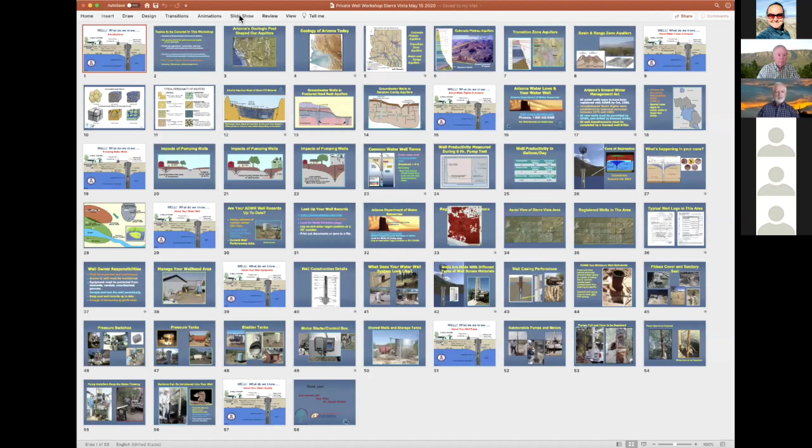All right, Janik, let's see if I can take over the control here and get my presentation going. Is this showing my desk? Just a moment. It does - that should be good. Go ahead, put it perfect. Are we good? All right.

Well, thank you, Marianne, and thank you, Janik, for the introduction. Let me just say something about my position. I am still a registered geologist, I am a past licensed water well drilling contractor, and a past president of the Arizona Water Well Association, which is the drillers' association. But it was introduced there on the slide as a Water Well Owners Association, which is something I dearly wish that we had, because unfortunately the water well owners throughout the state don't actually have an association speaking specifically for them. So having said that, let me just pass on here to a little bit of the review of what I was going to cover in my portion of the presentation.

I'm a geologist, so I'd like to give you an overview of the Arizona water resources and the aquifers that we have, and talk a little bit about geology, because geology affects the performance, quality and quantity of water that you get from your well. There's just no two ways about it. Everything depends on location, location, location. I'd also like to speak about the private water well regulations and the agency that controls this, issues our permits for construction, licenses well drillers and so on. I'll show some examples of typical domestic water wells that may help you identify with what we're talking about.

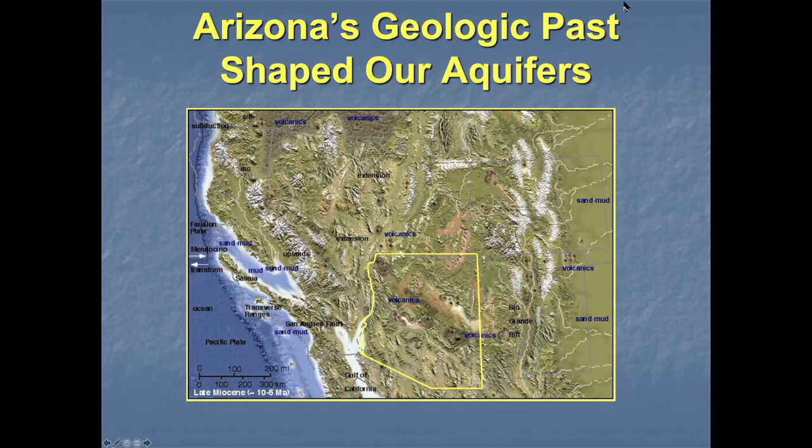As you can see here, representing 10 to 5 million years ago, there is a large area of California where the Central Valley was inundated by seas, and the Gulf of California hadn't opened yet at that time. But here's a picture illustration of what Arizona has today.

From a geologist's perspective, we say there are 3 major provinces in the state of Arizona. The Colorado Plateau province includes Flagstaff and a lot of the towns and areas up there, and the Grand Canyon of course. Up there, the geology is quite different than in either of the other two zones. The transition zone through Prescott runs from northwest to southeast through the state, and is predominantly a section of harder, crystalline, more resilient mountain ranges that have been there for millions of years.

Then the third area, down on the bottom third of the state, we call the Basin and Range province. In general, everyone's aquifers and the formations we get water from down there are pretty much the same, and they've evolved over the years.

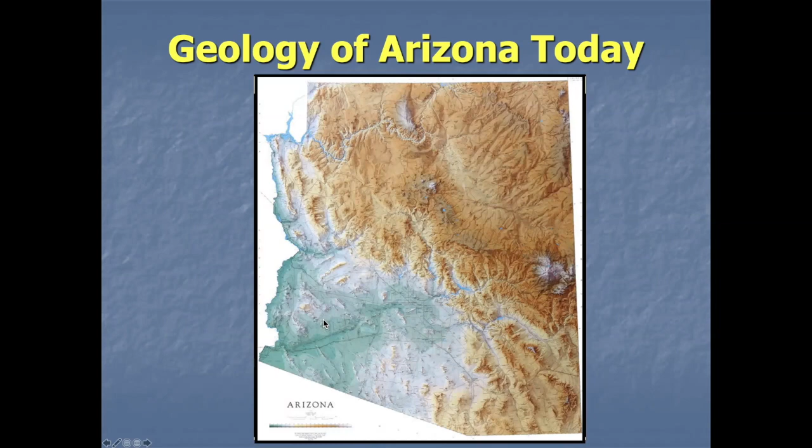Now, this is a topo relief map of the state of Arizona, where we can see that in the upper third of the state there are lots of ridges and valleys and even some drainages, such as the Little Colorado River and the major Colorado River running through it. I can also see a hint of some resilient mountain ranges running up and down through the center portion of the state, and then the Basin and Range province down here in the southern portion, which is predominantly where we are today.

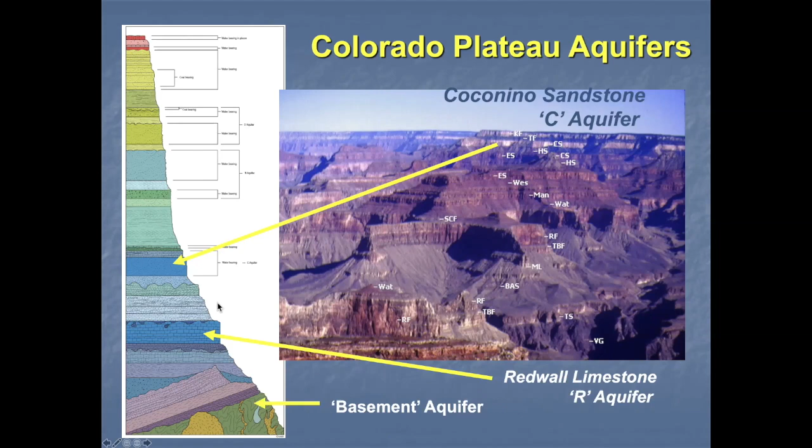If we look in the transition zone—we gave a presentation not long ago in the Prescott area, Yavapai County—the people there work with something slightly different. It's similar to the Grand Canyon suite, but some formations do not cover the crystalline rock. So their aquifers are crystalline bedrock aquifers, or fractured consolidated aquifers as we call them, along with a lot of very recent sediments, either sands and gravels or the basalts that have flowed out over the country up there.

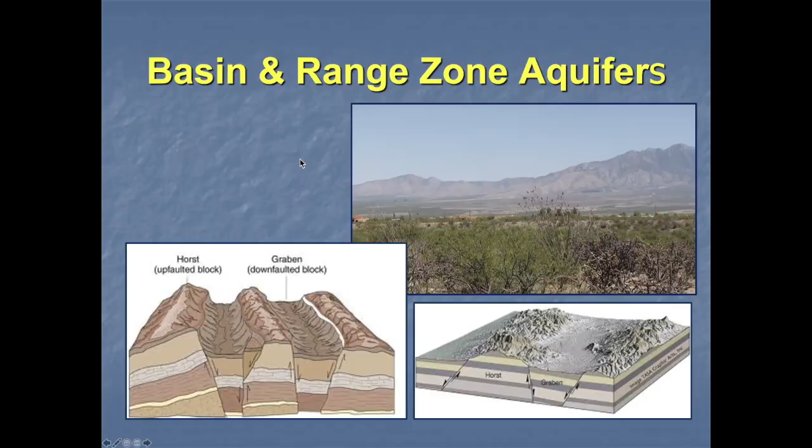As these blocks have settled down in these basins, in some cases hundreds, if not thousands of feet deep, and as they kept going down, water kept coming in, and in many cases evaporating. That's where the salt deposits came from in our area, and it's still going on in areas like Willcox Playa today. So that's a quick run through of the geology you may have in your particular area, or where your well is located.

But let me show you what that means for the availability of water for you. I'm going to talk about what we call porosity, which is the ability of different formations to have water in them, or to hold water in them.

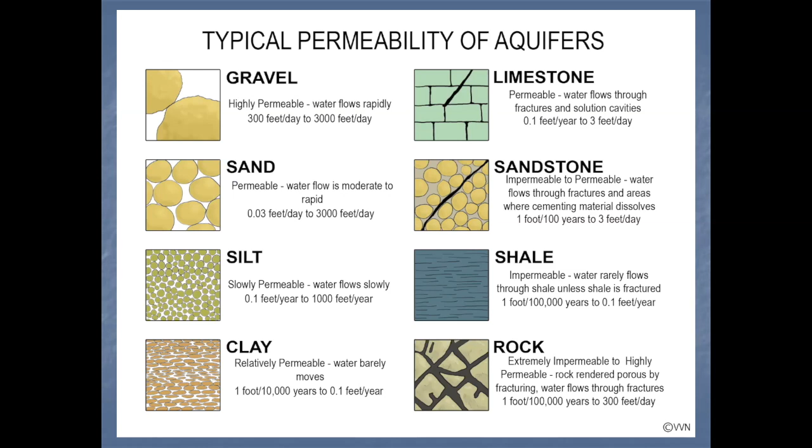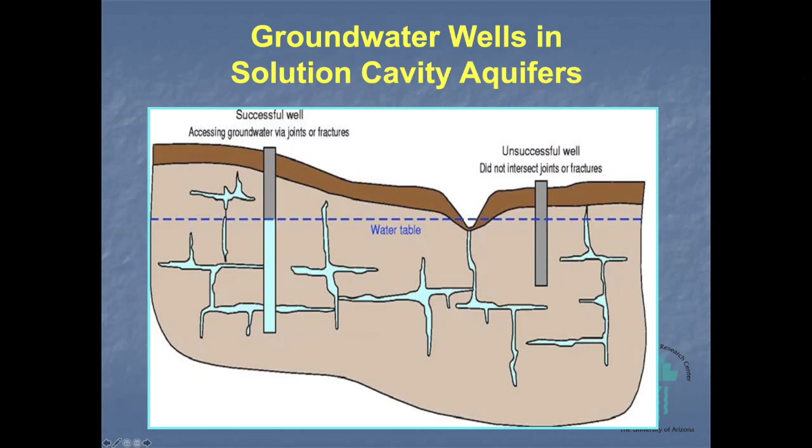And the same goes for down in the flats. It just all depends on fate and chance as to where your well is located, and we have to look at each well individually to probably find a reasonable explanation for the productivity of the water you get. Here's some additional illustrations that show how you could be in a fractured limestone formation and have a very good well because you're connected to a lot of the solution cavities, such as this one over here. And then you could drill another well in the same limestone formation but not hit any of the solution cavities and basically have a dry well. That's just the nature of the geology and the way it works.

Now, I could speak a little bit about water rights in Arizona, but in some ways that's a misnomer for the type of exempt wells that most private well owners have. But I can start by saying that the control and management of all the groundwater in the state of Arizona, which belongs to the Arizona public at large, is mandated under the control of the Arizona Department of Water Resources since about 1980, when the Groundwater Management Act was passed, and they became the controlling agency.

If your well was drilled before that time, it was probably still under their control. There's their website, azwater.gov. They have an 800 number you can call to get information about your well, or about aquifers in your area, or about water quality conditions known in your area. We can also note that the records about your well are public information, available to anyone who can go onto the internet and look the information up.

Now, this was relatively new at the time the Management Act was passed in 1980, but a lot of other states have followed up with this, and they also have their well data records public. California is just now, in the last couple of years, making all new well records public, but all their old data is still considered private information.

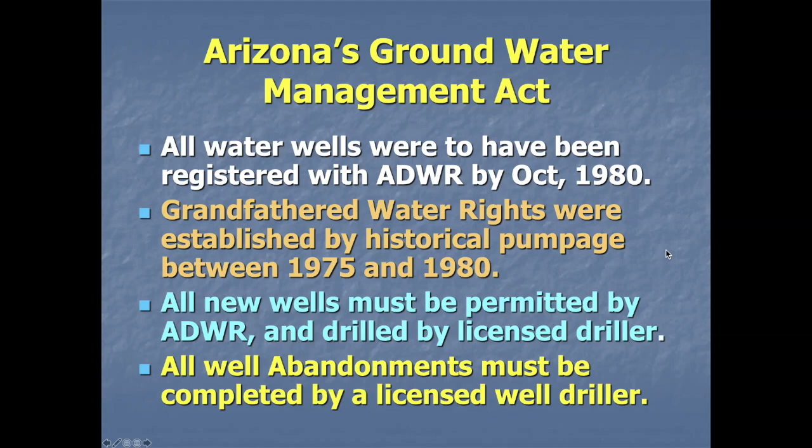So in theory, after 1980 at the very latest, we should have had a pretty good count and control of just how many wells of what type we had in the state of Arizona. I just wish that was as true as I've stated. I'll explain why in just a minute.

But now, Arizona did create, in the Management Act of 1980, 5 active management areas. Here they're illustrated, and you may have heard about them or read some news about them. The Prescott AMA is one, the Phoenix AMA is another, Pinal, Tucson, and Santa Cruz. But we are in Cochise County, mostly, our listeners today, I guess, so none of the rules that apply to the wells in those areas apply in Cochise County.

Talk a little bit about pumping water wells and how they actually work. Here we're going to use some kind of cartoonish illustrations to talk about a situation, and this represents as time has gone on.

Here's a homestead out in Cochise County. They built the home, built a barn next to one of the streams at original levels, drilled a well, and you can see their pumping water level has a little bit of a depression around it as the well is being pumped. But the water table, the static water level, as I'll refer to it later, the original water table is the same as the flowing stream that was over here. This would be a perennial stream. Any stream considered perennial is in contact with the groundwater.

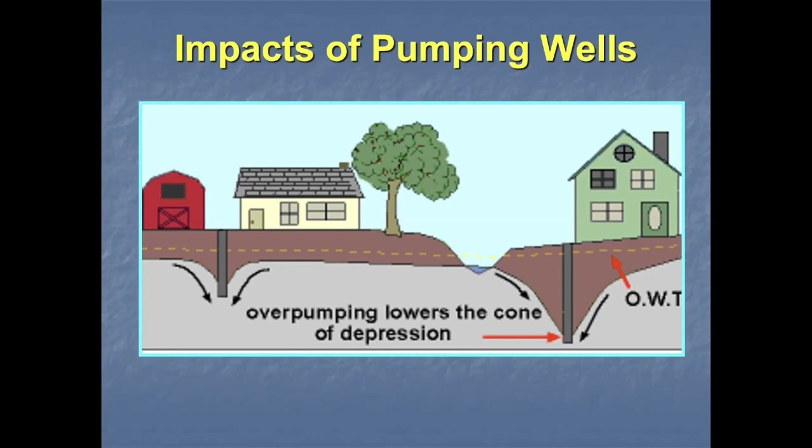Now, as time goes on, other people move into the area and also put in wells, possibly a deeper well. They might even pump it a little harder, drawing the water table down a little more. In some cases, it can have an impact on a neighboring water well, but it also has an impact on that perennial stream and the water table—they both get lowered. Scientists know there is a connection between the groundwater measured at this water table and the flowing stream. But in Arizona law, these are two different types of waters, controlled by two different types of management principles. But this is what's happening—they are connected.

Then we'll take a third scenario, maybe representative of what we're seeing today, where something comes along and pumps the aquifer, the same aquifer our homesteaders had their well in. Now it can be a factory, a farm, a bigger development, a community development, or anything like that that creates this—it can just be passage of time with continued pumping of the same aquifer. And it has, in this case, pulled the water table down below the bottom of the homestead well. This is something that has been occurring in Cochise County. It's documented. Unfortunately, that is the situation.

It leaves the homesteader with only the option to drill a deeper well or a newer well, maybe because the older well cannot be deepened. I can mention a little bit about that too, but everyone's aware now of these situations that can occur.

So I've already mentioned the term static water level. The static water level is sometimes called the pre-pumping water level, but it's the water level in your well when your pump is not operating. It's not perfectly static—it's being impacted by other people's pumping, and by the natural gradient of water moving from higher elevation to lower elevation. So it's not truly static, but we use that term.

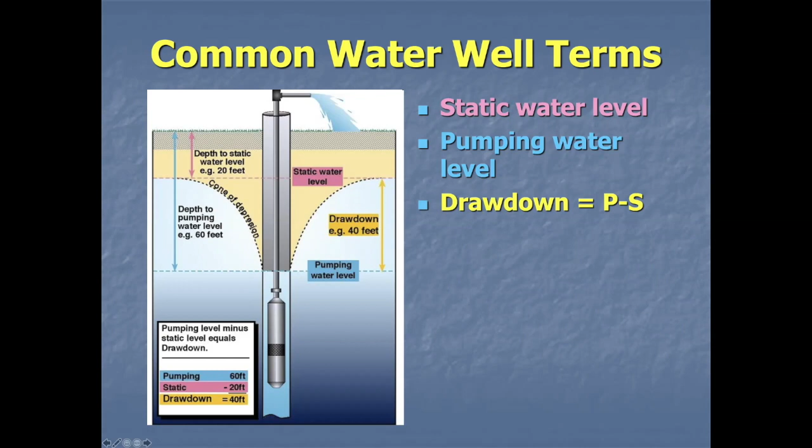The difference between the static and the pumping water level is what we call the drawdown. But what I'd like to bring your attention to is not just the pumping or static level or the drawdown, but the recovery rate—how fast nature puts the water back into the well when pumping stops. That's a very important factor, and it can only be determined by constant measuring of what's going on in a well. And I've done that.

This is an illustration of an aquifer test I did on a well some years ago. I started out—the static water level was almost 200 feet; we'll call it 200 feet for round numbers. Then I pumped it. It was equipped with a pump of 15 gallons a minute, so I pumped it at about that range. In the first few minutes, the pumping water level in the well declined quite rapidly.

And then it began to stabilize, still going down and down at a measurable rate. But after a certain amount of time, taking the water out of the well at 15 gallons a minute began to closely match the ability of nature to put the water back into the well. So this is where the graph of this line begins to flatten. It never gets perfectly horizontal because you're removing water from this area and putting it somewhere else, so it's still always going down.

But after a while, I had enough data to determine that this is the sustained yield of the well. In this case, it happened to be at about the same rate as the pump we had in the well, so we were not over pumping the well. After 6 hours of pumping, I turned the pump off and watched the recovery water levels come back, and in time they did. It took quite some time.

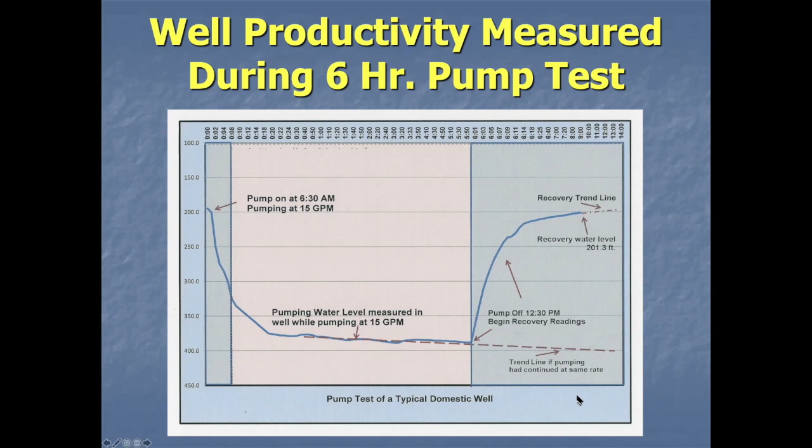But here's what I got out of that information. Pumping the well at 15 gallons a minute for 360 minutes, I got 5,400 gallons of water out of the well. During the next 6 hours, I let it recover, and I didn't get any additional water, so I still had only about 5,000 gallons. But with 1,440 minutes in a day, I could do 2 cycles of that type of pumping, so I estimated the yield of this well was conservatively 10,000 gallons a day.

Now that is a lot of water. A 15 gallon a minute pump is a pretty good size - that's about average. Most common pumps we sell these days are 15 gallon a minute, 1.5 horse or 2 horse pumps. So that's typically what wells are capable of pumping. But is that enough water for your home? I certainly believe so - it's half a swimming pool, and unless you're doing an awful lot of watering, that should serve you quite well.

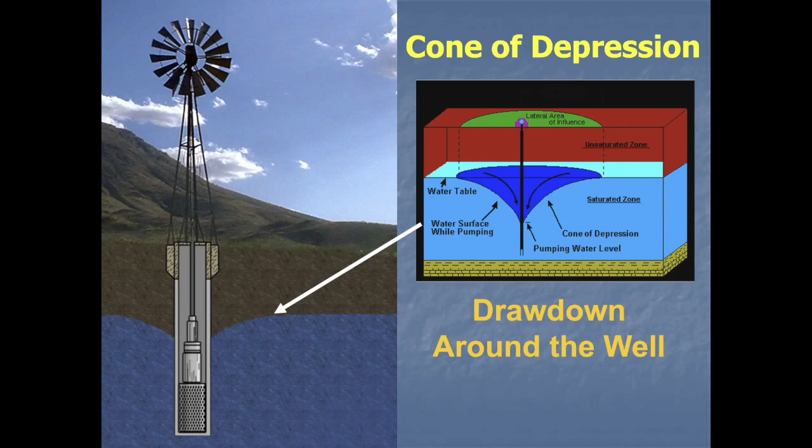As I mentioned, anytime the well is pumping, there's a cone of depression that it creates around the well. It's the phenomena that takes place as you're removing water a little bit faster than nature can put it back. That cone of depression is an area you should be thinking about, because you might want to consider what is happening in the cone of depression area around your well - what sort of activities are taking place there, what sort of things are you doing in the area around your well.

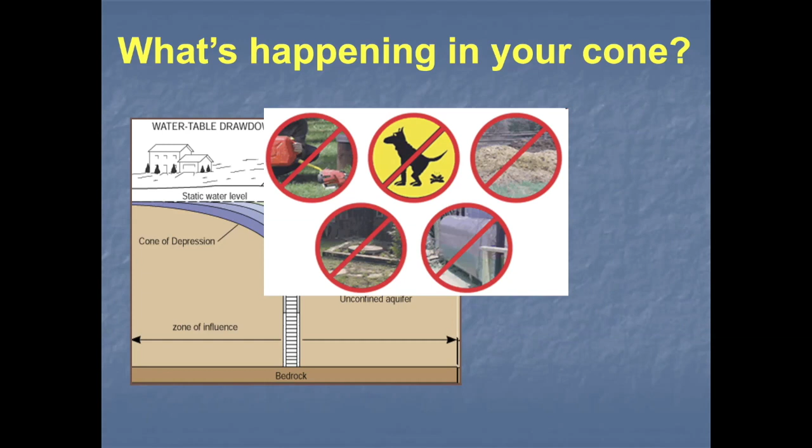Here's a few do-not-evers, if you can follow them. On the upper left, there's gasoline - you certainly don't want to be spilling any hydrocarbon products around your wellhead, as shown in the background. You'd like to not have animals depositing waste, either pets or farm animals. You shouldn't be composting or piling rubbish around your wellhead or covering it, as I have found in some cases. Also cesspools, septic tanks, or storing large quantities of hydrocarbons anywhere within the area of your well - these are all no-nos of things to take place in that area immediately surrounding your well.

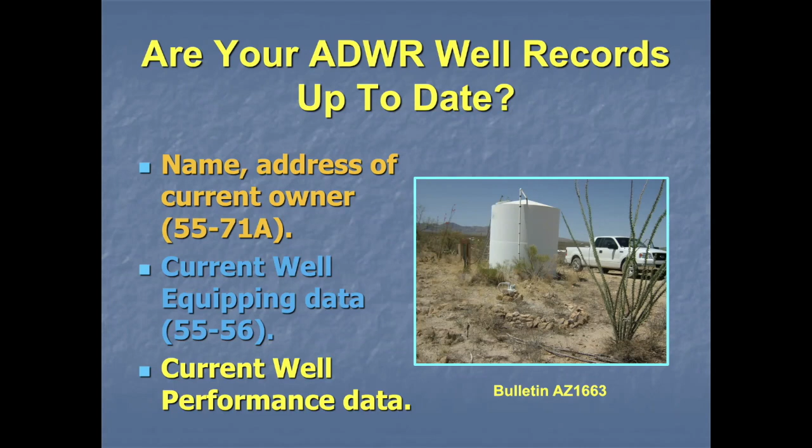You can log on to azwater.gov and do a little poking around on their website. You can select something called the Imaged Records Database and look through there and find your own particular well. You can look it up through a number of different ways. If you happen to have some correspondence from the Department of Water Resources with any communications on it, they will refer to a 55 number for your well. Every well in the state of Arizona has a unique registration number.

It begins with 55 dash and 6 digits. So if you know that number for your well, it's quite easy to look that up and find your records in the state database. And then you can print all these things out because they're all PDF files. So that's what we encourage you to do—go online to the Arizona Department of Water Resources, poke around in there and look up your well records. Once you find some of those records, print them out and keep them available for the next time you need a service call.

Currently, the ADWR map of that same type looks like this, where the dots are so big and so jumbled up you really have to zoom in on the right area before you can find your well, but it still works the same way—you can zoom in. Here's what happens as you zoom in: each time I click, I get in a little bit closer and a little bit closer, and finally, if you zoom in enough, you can see streets and roads.

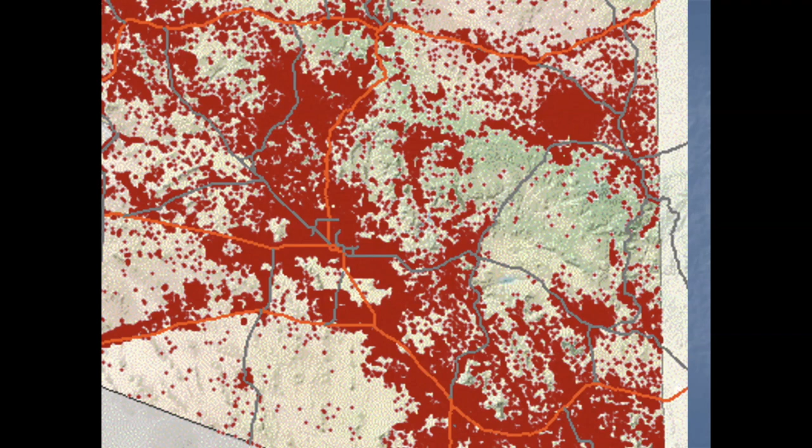As I just did here this morning, on the ADWR website there is now a place where you can put in your street address or the street address of your well, and it will take you to the well records. It's not as direct as filling in the 55 number with the 6 digits and going solely to your well, but if you fill in the address, it will take you to a nearby location, and you can poke around a little bit and find your well.

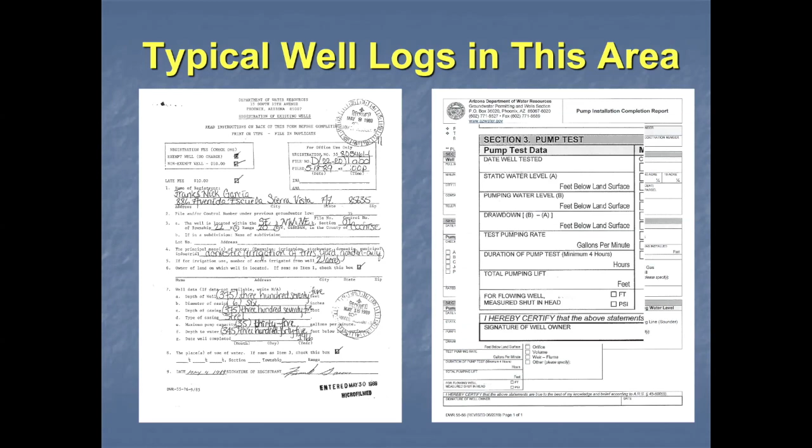Now, in the bottom left-hand corner of that form is this little square here, and this is the most important information probably about your well, other than the total depth drilled and who drilled it and when. It's the pump date that the pump was installed, the static water level, the pumping water level, what was the drawdown after 4 hours of pumping. You notice that this form suggests there's a minimum of 4 hours of pumping, not 6 hours as I did in my test, but at least enough to know more or less what the sustained yield of the well is.

And here it says, I am the owner of this well, you sign it. They did not put the responsibility for this onto the pump installers—it's on the well owner to take care of this. So owners have responsibilities to take care of your wells, and you must look at them, maintain them, and inspect them once in a while.

We wrote another bulletin about what to look at and listen for when you go out and inspect your well, and there is literature out there you can find about this when your well is operating. The other thing that bothered me most as a contractor was access to the well. A lot of well owners fail to keep quick access all the way to the wellhead. That must be maintained, because the minute the well goes down, you call the well and pump contractor to come out there and work on it. They need to be able to drive right to the well with a motor vehicle, possibly with a crane truck, to pull the pump out of the well.

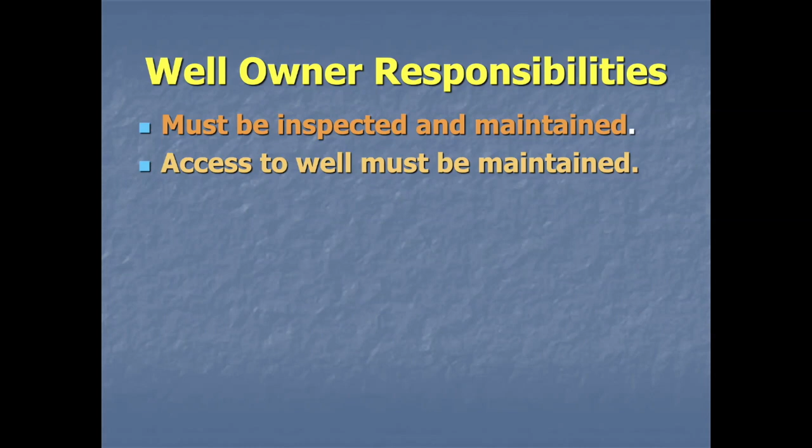And if it's behind a barrier, a wall, or inside a building, or hidden in the rose garden, or trees have grown up in the way, you're just asking for more expense and more time before a contractor can get to your well. These are things that a lot of times homeowners don't think of.

Lots of times I saw too that wells weren't protected properly from the elements, both the sun as well as the cold, and also vandals and unauthorized persons. I could put roaming pests in there too, such as javelina, deer, and other things that have gotten into wells and caused damage. They should be properly protected.

One of the by far most important things that's a well owner's responsibility is to sample and test the water from the well periodically. I will say it once here, and Janique will say it many times over: no one is watching out for the quality of the water that comes out of your well except you. And if you're not sampling and testing it, you don't know what you're drinking.

The other thing I speak to a lot is keeping your well records up to date. As a contractor, it's a lot better for me and for the homeowner if you call and say, hey, my pump has quit working, and I ask you, well, what size pump do you have in your well, and how deep is it set? Because maybe I wasn't the contractor that put the pump in the well 10 years ago, but now it's got to come out. You need a new one.

It's a lot nicer if you can tell them, I have a 15-gallon-a-minute, horse-and-a-half pump set at 300 feet. Now that contractor knows exactly what to bring to your site, and you'll get your water flowing a lot quicker than if he has to guess or pull it out before he can even find out what's down there.

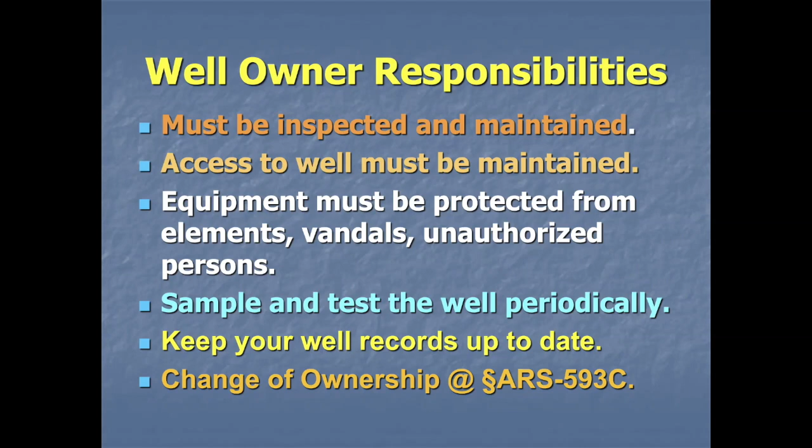Now, a little bit about some of the equipment in the well. I've generated some drawings that have been made available in a lot of our publications. This is a fairly typical standard above-ground completion of a water well, or probably a newer one, because I call it a two-piece well. Most of the wells today are constructed in this manner, by installing a steel surface casing to a depth of about 20 feet, no less than 20 feet.

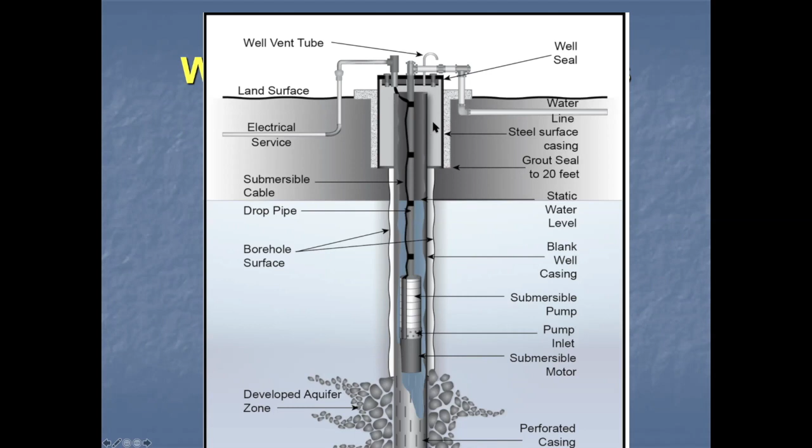That's a minimum in the state of Arizona. It's 50 feet in some counties in California. Then the driller will drill down, say, a 7 or 8 inch diameter borehole to the total depth, and then put in a 5 or 6 inch diameter, maybe PVC or possibly steel well casing. In this case, this drawing illustrates a smaller diameter casing inside the larger diameter, maybe 8 inch steel casing, and the well is completed after that, and shows some of the information.

Now in Fairbanks, Alaska, that'd be about 9 feet down, but in Prescott, Arizona, that still might be only 24 to 30 inches in the ground. But this type of well completion has nothing else around it. It's very sanitary, very safe, and can be located anywhere that the contractor can quickly and easily get to it. And then you have the bladder tank and control equipment in another location that can be sheltered and kept out of the elements. But the well itself does not have to be located inside a building.

Here's some examples of well completions and so on. In the upper left-hand corner, it looks like a 6 inch steel casing sticking out of the ground. This homeowner had a sediment filter in line directly at the wellhead, and Janique will speak a little bit about that later on. Sometimes it's necessary, but a properly constructed well shouldn't have too many particles coming out through it.

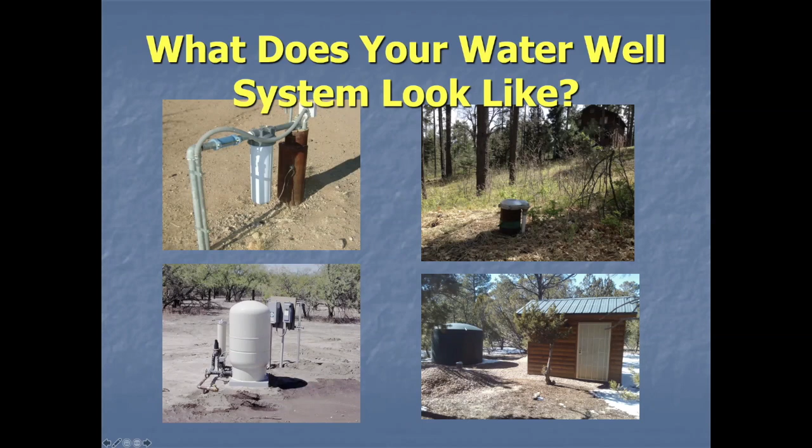Here in the bottom left-hand side is another above ground completion of a well showing the captive air bladder tank and the controls all located in one small area. I have over here on the right-hand side a pitless adapter completion in one of the intermediate areas like around Prescott, where you can see that the well can be anywhere out in open area. A storage tank can be anywhere to hold water. They usually don't freeze, certainly all the way through. And then the pumping controls located inside a building. That makes a pretty good arrangement when necessary.

Now, wells themselves are made of different types of material, but they all have something we call the well screen area. Typically it looks something like this. It can be PVC, mild steel, stainless steel, or a number of things. But it has to hold back the formation down in the ground and allow the water to come in while keeping the sediments back. It's typically installed by drilling a slightly larger diameter borehole in a fairly straight manner, then lowering the casing down into it, and completing the well possibly with some gravel packed material around the outside.

This is just an illustration of how that's done. That leaves you with an area where the perforations are the deepest part of the well, well below the surface of the water table. If it's properly constructed, we like to have the pump installed with the submersible pump and motor in the blank casing above the perforations. This forces all the water that comes into the well to replace the water that you're pumping out to come into the well through the perforations and then flow upwards.

Typically that's at a pretty slow rate if it's flowing upwards. By flowing upwards, it not only cools the electric motor, but it typically is not flowing fast enough to carry sand. So any sand or sediment that would come in would fall to the bottom of the well, the water would flow up, and that makes your pump last a lot longer.

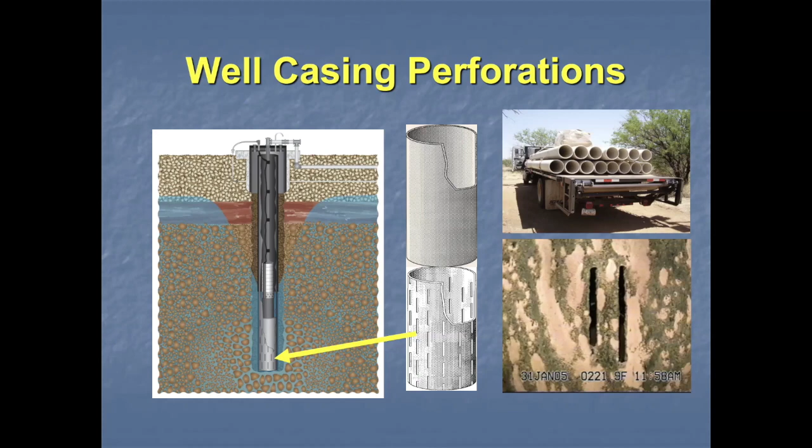But over time, these perforations - and here's a picture of one from a video down in a well on the right-hand side - show that these slots can sometimes begin to close over with chemical precipitation and with microbiological precipitates around that too. I'll say a little bit more about that in just a minute.

But here, I want to show you one of the other minimum well construction standards that we have in the state of Arizona. Every new well since 1980 was required to have, well theoretically actually 1.5 inch thick by the numbers, but 2 inches is the way we describe it - a 2-inch thick layer of cement grout around the outside of the uppermost steel casing to a depth of 20 feet. That's why the wells are made oftentimes with this 2-piece construction: the 8-inch casing set in a 12 or 14-inch borehole, cemented in place, and then the 7 7/8 borehole drilled down the bottom, and then in this case 6-inch steel placed through that.

Now every well has to be constructed that way. If your well was drilled before 1980, it can still be considered legal and safe and accessible until you perform a modification on it. Then it has to be brought up to standard. So the other thing about Arizona that's quite unique is that we do not allow this upper 20 feet of casing sticking out of the ground to be PVC.

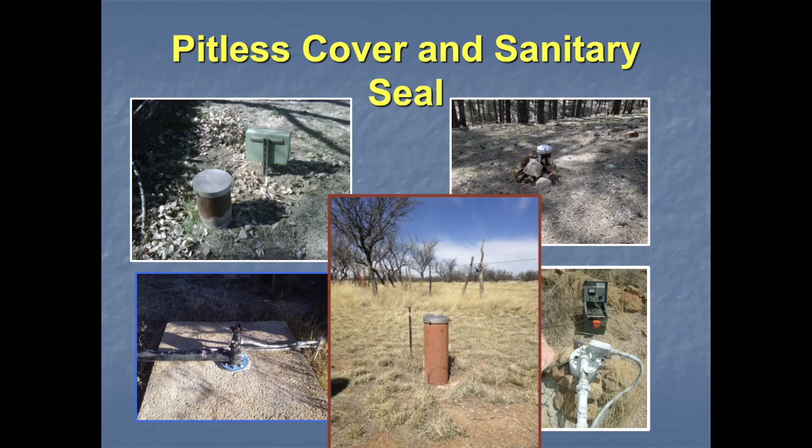There should always be a foot or 2 of stick-up of the well casing out of the ground. So if yours is too close to the ground, you might want to dig some of the dirt away from around it to make it safe.

There's not too many objects around a private water well that the typical homeowner can service, maintain, or look at. The one that can be looked at with a little bit of care is this pressure switch, the little gray box with an acorn nut on it, shown here in the lower right-hand corner. If you take that acorn nut loose and lift the cover off, you'll see what looks like a series of switches and maybe some wires contacted in there. These are the point contacts that typically turn your well and pump on and off.

So if you take this cover off and you have 4 wires there, that's 230 volts—you want to be careful, so you might want to shut the power off before doing it. But one of the homeowner service things you could do is take this cover off, look down at those points, and make sure the space between the points is not filled in with dead ant shells.

Ants have a common habit of crawling into these little devices, and they happen to be inside there when the points try to come close, and their little hard shells are non-conductive—they don't allow the electricity to flow from one side of the points to the other. So there, you've just saved yourself a $100 service call if you can turn off the power and clean out the dead ants in the contacts. That just might be the one reason why your well is not working. If it's anything more than that, you probably want to call a licensed well and pump contractor.

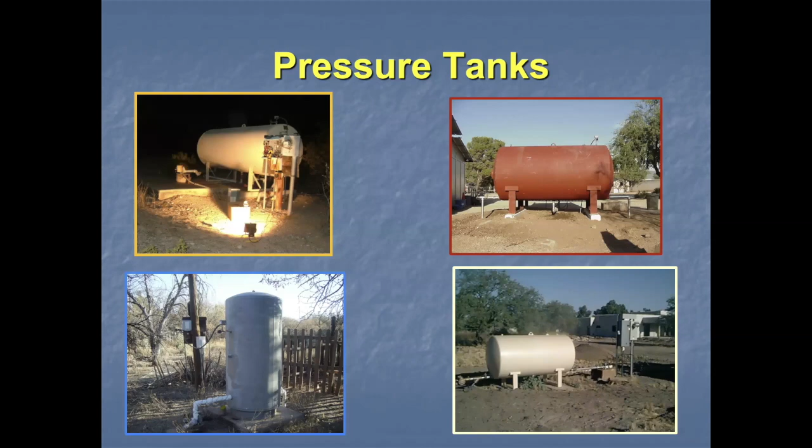There's just some other examples of tanks that were common in older days—hydropneumatic tanks, we call them. Air and water were in contact with each other. They did require a little bit of daily or weekly maintenance to see that they were staying at about half water, half air in them to make them balance.

But fortunately, some years ago, bladder tanks came along, and they looked something like this. Most of these bladder tanks that have now replaced the hydropneumatic tanks have a bladder of some sort on the inside that expands as the water is pumped into it. Compressed air is held in the chamber above, and air will compress, water won't. As the water comes in, it compresses the air in the tank and shuts the pressure switch off when it reaches the desired setting. Then the captive air in the top of the tank pushes the bladder downward and pushes the water back out into your sink or whatever you're doing.

The important thing to recognize is that from time to time, this bladder in the tank can and does rupture—usually it takes 5 to 7 years or so, though they can go sooner. When the tank bladder ruptures, water goes through there, air begins to dissolve into the water, and pretty soon the tank becomes waterlogged, with no expanding and contracting air. So the pump pressure switch comes on and off, on and off, almost instantaneously, and that can damage and destroy the motor and pump in your well in very short order.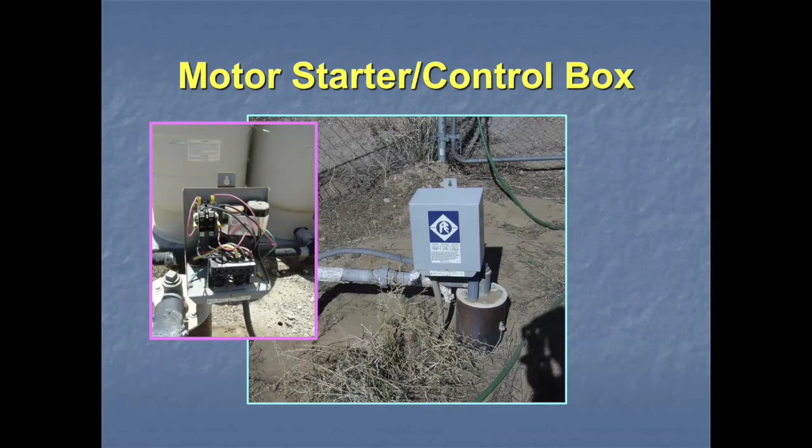A lot of the starter control boxes that we find on wells completed in Cochise County and other areas look something like this. There's not an awful lot that a typical homeowner can do to service these units. They're full of electronic components, and unless you're familiar with electricity and testing equipment, it's very difficult for most homeowners to diagnose what might be wrong with the well. Call a licensed contractor to come out and check your well and tell you whether it's just in the control box, the pressure switch, or something down in the well.

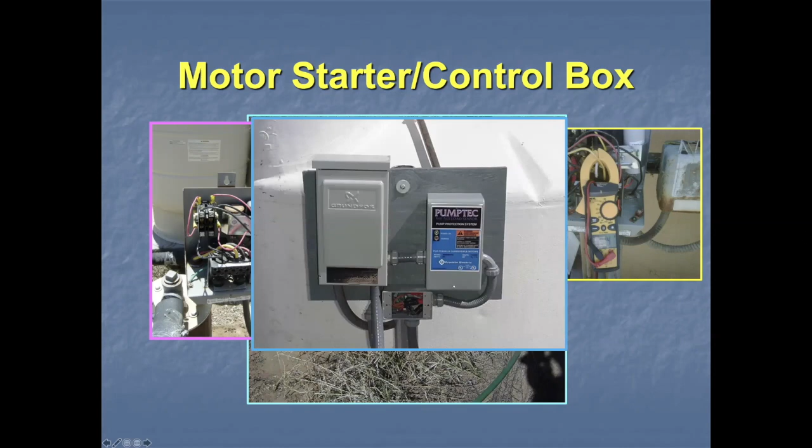Here's the preferred way of mounting them. I have a disconnect and a starter control box on this panel away from the well, not mounted right on the well. Another device that I'd recommend many well owners should have is a Pumptec device that saves the pump and motor in the well from operating in a run-dry condition. That's a very good aftermarket product to put on there to save your pump.

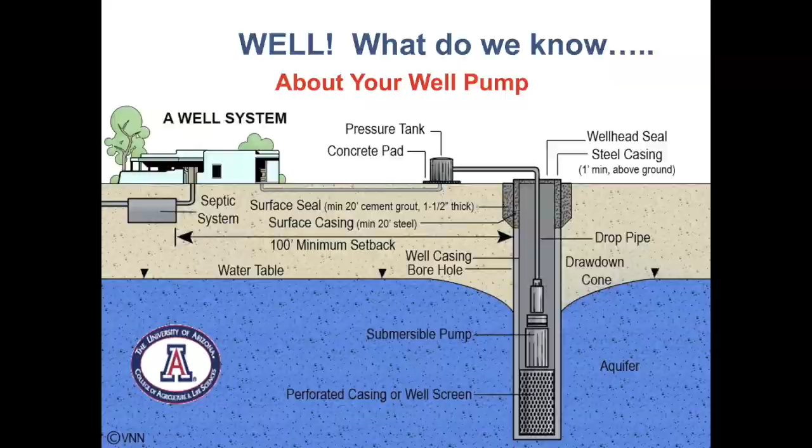From time to time, you're going to have to consider replacing the pump in your well. It's going to be necessary. They oftentimes should last 7, 10, 15 years. It kind of depends on the operation, power surges, and how often they start and stop. But I've pulled some that have lasted 20 years.

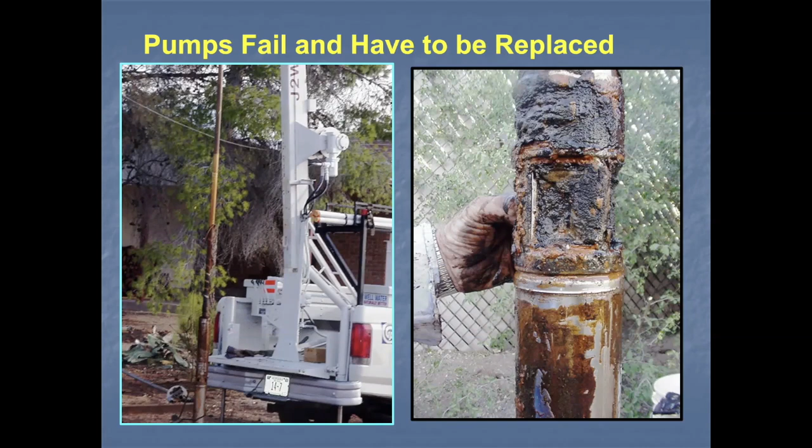Here's a galvanized pipe in this photo on the right, showing the tubercles or blisters that form, and how underneath those deposits bacteria are working to literally eat holes in that pipe. Sometimes they'll eat a hole so drastic that you don't get any water out of your well. Your pump and motor is still perfectly good, but your drop pipe has a hole in it. They'll also attack the electrical wiring and make it difficult to get the pump to operate.

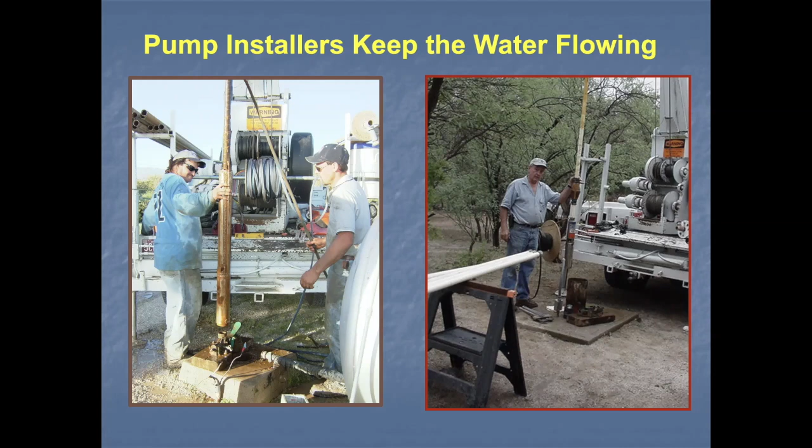The last couple of photos I'm using here show, on the left, former employees of mine pulling a pump from a well, perhaps putting the existing pump back in. Take a look at how they're working, and how I'm working over here putting my own pump into my well some years back on this side. This is fairly typical of what servicemen do these days and how it has to be done. This is not operating-room-clean procedures, and you can see that because we typically didn't have gloved hands on at the time. We weren't wearing masks on our face at that time, but times may change now.

This can be one of the sources of the introduction of bacteria into your well, just human caused. They can be a problem, although the kind of bacteria that we talk about that's most serious and most harmful to humans when they start to drink the water comes from a different source.

But I'm going to let Janique come in here now and take over and talk about the perils of bacteria in your well and what some of the other things are that might be in your well and so on. Janique, how about that?

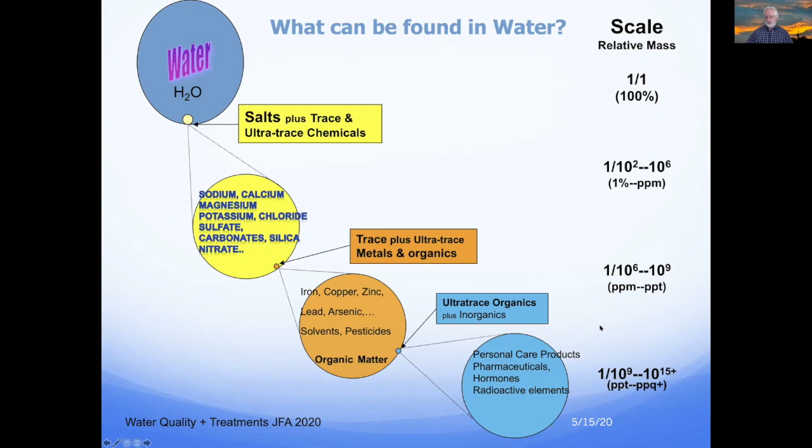So what has that got to do with you as a well owner? We don't really know how many of those new emerging contaminants are going to wind up in the groundwater eventually. We know that some contaminants that wind up in septic systems, such as salts, can and do wind up in the groundwater over time—nitrates and salts. So you always need to be careful of what you put in your septic. Potential sources of groundwater contamination include obviously your septics, your septic tank.

Similarly, nitrates and pathogens fall into this category of contaminants. Gary may have mentioned hydrocarbons, basically fuels from storage tanks, diesel, gasoline - we call those floaters, meaning they tend to float on your aquifer if they ever make it down there. But some of those floaters do dissolve and move long distances, and they can be a problem.

And finally, the worst category are solvents, which we call sinkers. They sink through the profile to the bottom of the aquifer. If you happen to have a shop with solvents and things like that, be careful, because they do tend to move through the profile and are very difficult to get rid of in the groundwater.

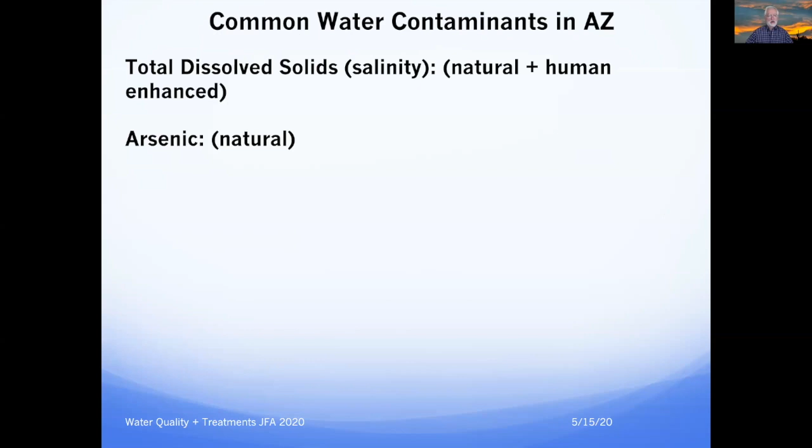Common contaminants in Arizona are much more mundane, and we have a lot more information about those, based on a 20-year study by the Arizona Department of Environmental Quality, including arsenic, nitrate, fluoride, and gross alpha radiation. We won't talk about metals like lead and cadmium at this point, because even though we have data on that, it's much less widely available, so we cannot generalize as much as with those other types of contaminants due to this long-term study.

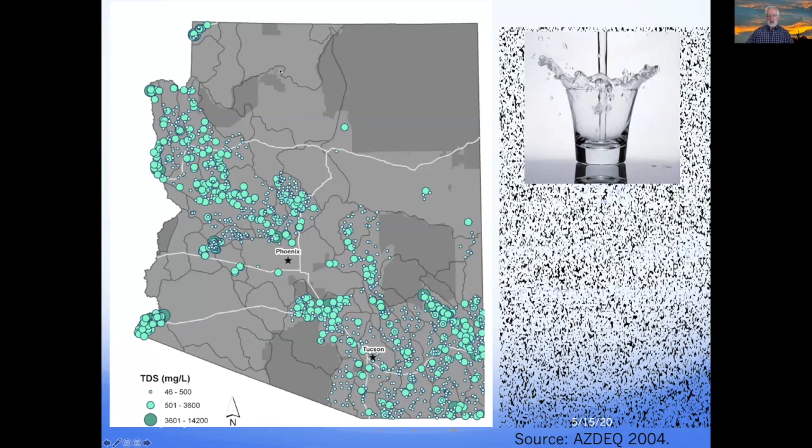This is total dissolved solids, mostly, again, due to the dissolution of minerals. And here in your area, you may have some wells that may have higher than 500 parts per million TDS. You'd know that if you've tested your water, and you may or may not be using an RO unit - we'll talk more about that later.

This is nitrates, also fairly common, can occur naturally or from agricultural, irrigation, or septic systems. As I mentioned before, you don't seem to have a lot of issues with nitrates here in your area. That's good - most of the values are less than 10 parts per million.

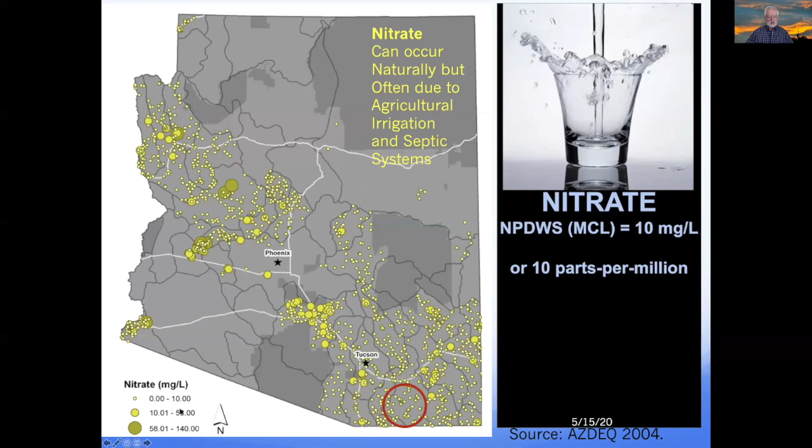Fluoride here is also locally due to local geology and fluoride-rich minerals, basically not associated with contaminants typically or with discharges of any kind. So here you may have some areas with high fluoride, but you seem to be doing pretty well when it comes to that particular contaminant.

The last two - gross alpha radiation is a kind of hodgepodge of uranium and other radiation-emitting contaminants that are usually naturally occurring. You can analyze for them using gross alpha, which gives you radioactive counts, and you can also measure radon separately, and uranium, which has a standard of about 0.03, or 30 parts per billion.

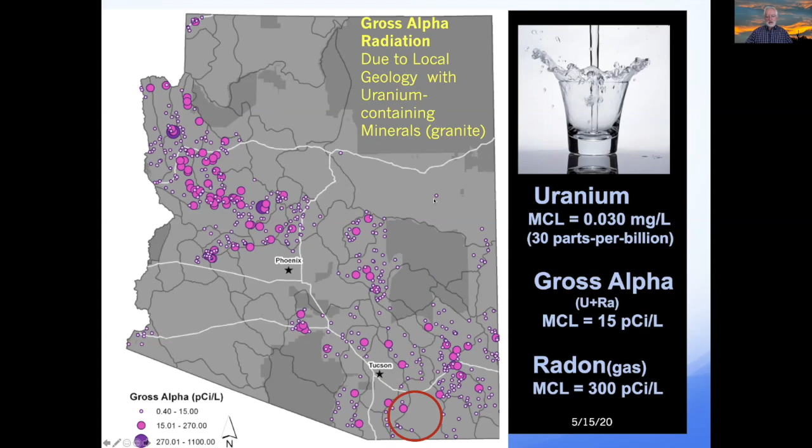And in your area, again, you may have some hit and misses, not too much of an issue. Arsenic is a bad boy here in Arizona, and if you don't get anything out of these workshops, please, if you haven't done it yet, test your water for arsenic.

Arsenic is naturally occurring for the most part due to our rich geology, rich minerals. And the good minerals come with the bad minerals - if you have arsenic, you may also have lead and copper, which is mined throughout. So we have a very rich geology, but that unfortunately also brings some bad actors such as arsenic.

So a summary of these maps is based on this study referenced here by Towne and Jones, from 2011 to 2016. It was done collecting samples from up to 1,766 wells throughout Arizona. It shows that about one in five wells has elevated levels of arsenic, one in ten wells has elevated levels of nitrate, one in ten for fluoride, and gross alpha radiation is about one in six or so.

So your odds are pretty high, if you believe the statistics, that you could have a well with, let's say, elevated levels of arsenic - one in five. Other findings of this study, which was quite extensive and took almost 20 years to complete, show that more than 50% of wells failed what's called the national standard for elevated levels of TDS, and we'll talk about the standards in a minute.

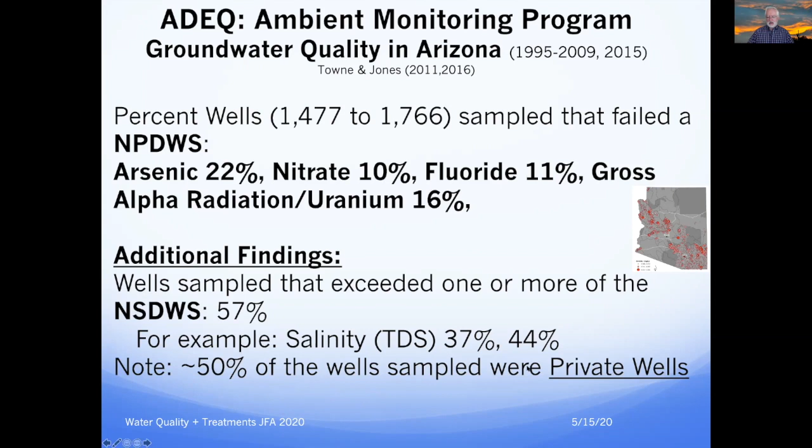Worthy to note is that about 50% of those wells sampled in that study were private wells. So that gives you data not just about production wells used by public water utilities, but also data from private wells. These are significant findings.

Background about the standards: drinking water standards do not apply to you, and we'll be saying that again. You're really responsible for the water quality of your well, and making sure you're not drinking bad water.

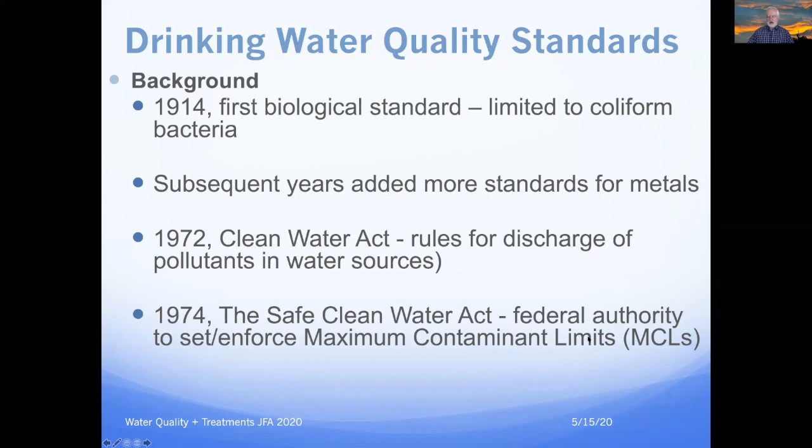A quick background: in 1914 we had some biological standards, but it wasn't until the 70s that we moved through the Clean Water Act, and later the 1974 Safe Drinking Water Act, which gave the federal government authority to set maximum contaminant limits, which are protective of our health. Importantly, they're constantly evolving, but again, they don't apply to you.

Let's go briefly through the standards. The secondary standards are non-enforceable, and tend to be more related to aesthetics, taste, and delivery. For example, you may have a bad metallic taste in your water, or high salts. These aren't necessarily bad for your health, but they make the water undesirable or not very good to drink. The primary standards are the ones you need to watch out for.

Those primary standards are associated with health consequences. They have MCL standards that are enforced by public water utilities, and there are penalties if they're violated. Public water utilities cannot exceed MCLs, and if they do, they have to report that to the public. But private well owners are exempt.

You are exempt. So if you don't learn anything else from this workshop, it's that you really should be testing your water, making sure it's safe from the contaminants we've mentioned and will mention again.

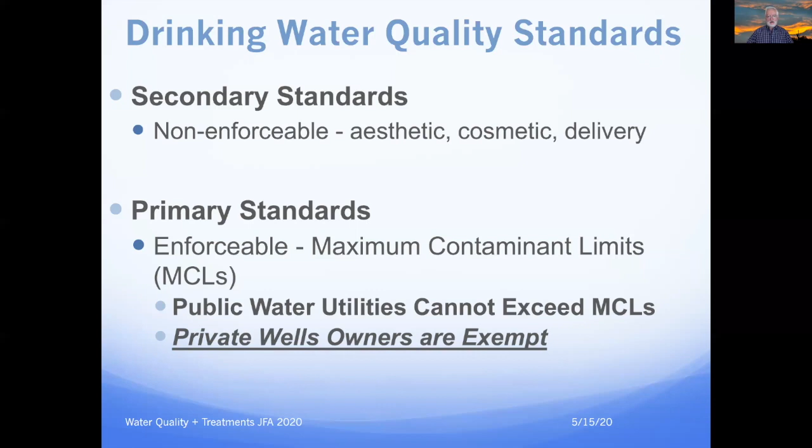These are secondary water standards, basically for TDS, 500. A lot of people drink water with higher than that TDS salinity and nothing happens. But if you get much higher, taste and other possible long-term consequences could occur. Again, it's not necessarily associated with a health issue at this point.

Fluoride has two standards, a 4 and a 2. The 2 is a secondary standard, but the 4 is now the primary standard. Copper also has two standards - there's a copper rule now related to copper and lead. Violations at the primary level are health-related, while violations at the secondary level are mostly cosmetic or taste-related.

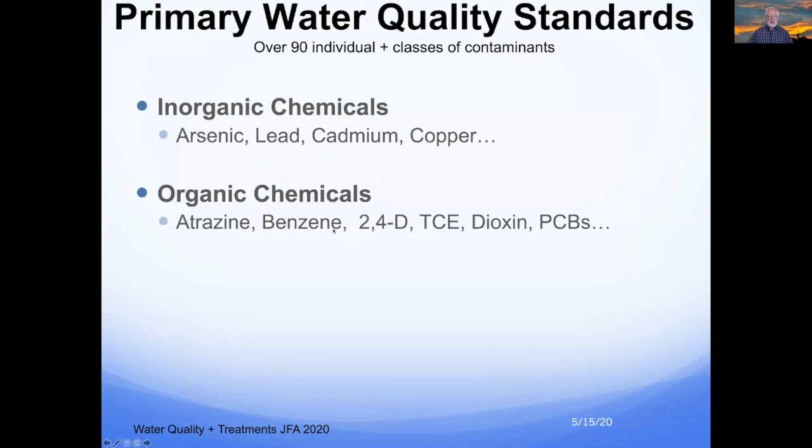But the important ones are these primary water quality standards, which are divided into categories. There are over 90 individual contaminants and classes of contaminants falling under this category, divided into 6 groups: inorganic chemicals like arsenic and lead, organic chemicals like atrazine, benzene, solvents, herbicides and others, hydrocarbons, radionuclides like gross alpha radiation and uranium, and also disinfection byproducts, which are also regulated.

We mentioned organic matter before, right? One thing that happens when you mix chlorine or another powerful oxidizing agent with organic matter is that you form disinfection byproducts. We did not know this when we began disinfecting water early in the last century, and we saw huge drops in mortality rates from waterborne pathogens. But we didn't realize until the 60s and 70s, when analytical chemistry caught up, that these chemicals were formed as a reaction between chlorine and organic matter ever-present in all waters, even deep groundwater. Several families of these chemicals form, and new ones are always being found. Many are carcinogenic or have carcinogenic properties.

That's why Gary and I recommend that if you want to chlorinate your well, it be done using a contractor who can properly scrub the well and then pump it out, making sure there are no residual levels of those chemicals, or at least chlorine, that could be bad for you. Turbidity is also important, and we'll talk more about that when discussing filtering your water, because it's now associated with chemicals and pathogens.

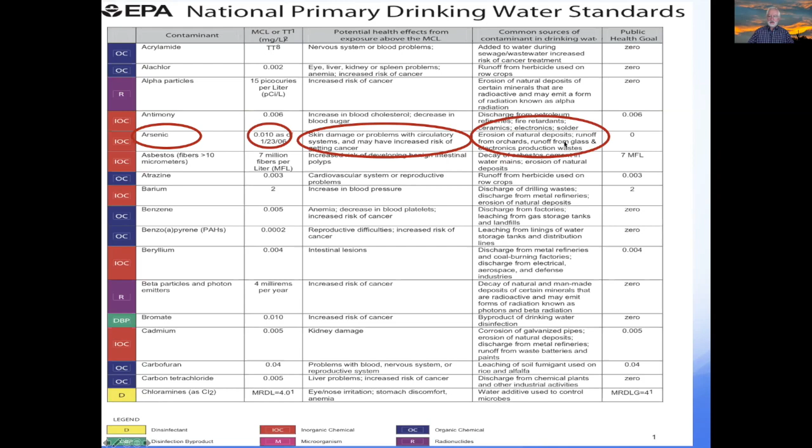So where do you sample? Typically we like to sample at the wellhead if we're looking at just groundwater contamination. But if you sample inside your kitchen sink, you'll have to go through the storage tanks and pipes, which can also add contaminants. So you should be mindful of what kinds of pipes you have in your house and whether they could potentially cause contamination.

When to test? There's a table, 8.1, in the Well Owner's Guide, 2nd edition, which we recommend you download if you haven't already, and look at that table. We have an annual recommendation, and I'll mention some of those in a minute. We also recommend testing your water if there's any change in taste, visual color, any changes in health, or after any pump maintenance, activity, or flooding near the wellhead.

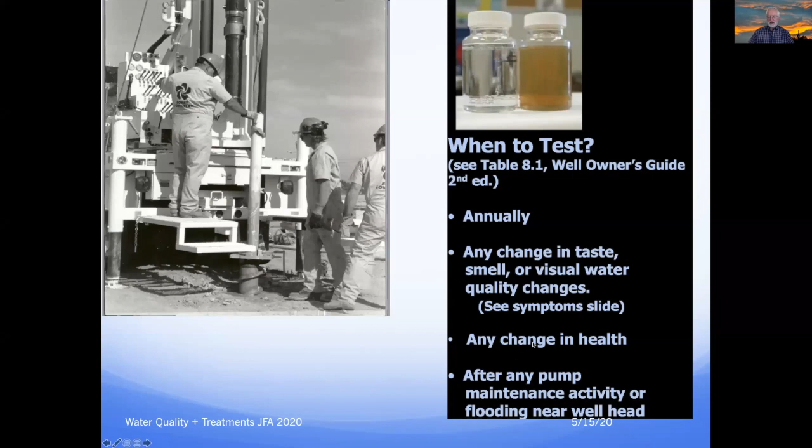Costs vary, but the basic water quality parameters you may want to consider testing, at least initially and not necessarily every year thereafter, are pH and salinity. These should not change much over time. Neither will other ions, but they'll give you an idea of your water quality—sulfates, chlorides, and so on. Fluoride, nitrate, and arsenic you should test initially and know that information.

Nitrates you might want to test annually because they're very mobile in the environment and could come from your septic system. Arsenic you might test every 2 to 3 years, but it won't change very often—neither will fluoride, because if it's in your aquifer, it will be there forever. Gross alpha radiation and uranium are the same—once tested, they very likely won't change over time.

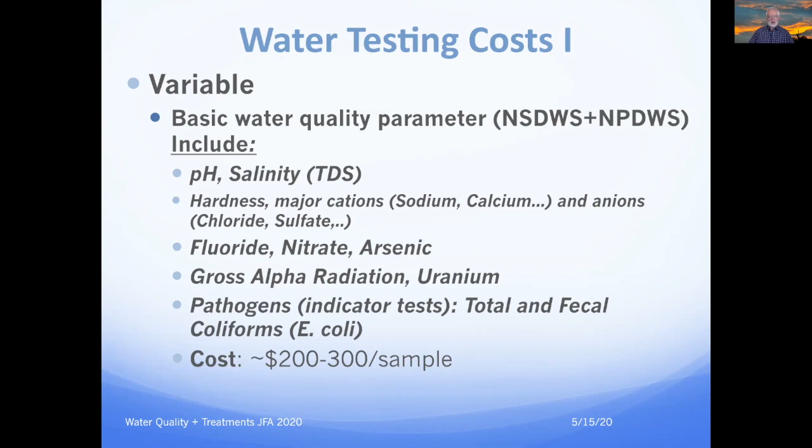Pathogen indicator tests are important to do annually, at least for total and fecal coliforms and E. coli. Those tests alone may cost $50, but in total all those tests may initially cost about $200 to $300. Thereafter, you may want a test that costs maybe $50 to $75 if you do indicator tests—total and fecal coliforms and nitrates—at the very least annually as a safety precaution.

Water testing costs here—if you were to test for all the standards in the National Primary Drinking Water Standards, you'd see tremendous cost increases. But would you have to test for all those standards, the 90 categories of families of contaminants listed before?

No, you don't have to do that. Those are usually only done for production wells, and they would cost a lot of money. We don't recommend you do that—just stick to the list that we provide.

Make sure that your well is registered and the registration and address are up to date, so that if there are any issues happening in your local area, you'd be properly notified by the Arizona Department of Health Services, ADWR, or other agencies that may want to warn you about a potential issue. Make sure your well is properly registered and under your name, as Gary suggested.

Water testing laboratories should provide you with clean, sterile containers and clear instructions on how to collect your water samples. These laboratories must comply with state and federal guidelines, use EPA approved methods, and be certified by the state of Arizona.

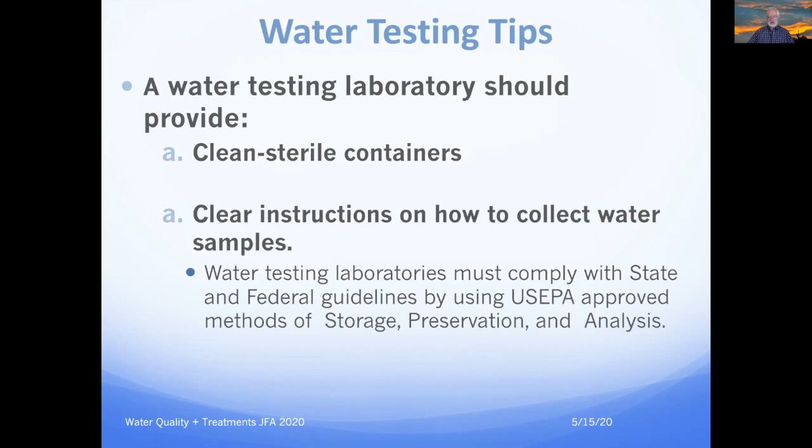Water testing tips: proper sample collection includes flushing the system, or well purging when appropriate, but most of the time you have to avoid collecting stagnant water. The best time to test is at the end of the day after you've done your laundry and irrigation and flushed all your pipes and storage tanks. At that point, fresh aquifer water will be representative of what's in the aquifer, not what might be added from long stagnant water inside your tank.

Water treatment options. You should consider treatments, and when you do consider options and treatments, make sure you connect with reputable treatment professionals who can help you determine the best approach. But the more informed you are about your options, the better off you are, and that's why we're giving you the following sections.

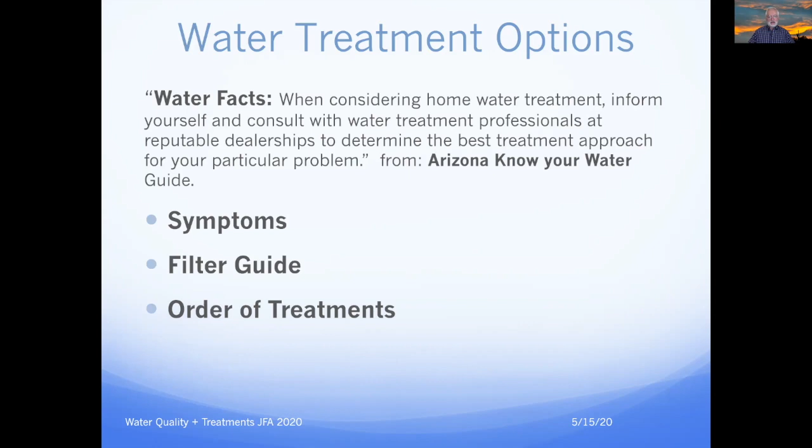Those sections are also in your well owner's guide, as well as this other publication called Arizona Know Your Water Guide: symptoms, filter guides, order of treatments, and specific treatments. Let's look at the treatment options.

Consider symptoms. Visual color or cloudiness may be due to aquifer fine particles, organic matter, pipe or tank corrosion. Bad smell or taste could be due to salts, metals, solvents, hydrogen sulfide, reduced conditions, algae, or chlorine if you were to add too much.

Illness, particularly in people who visit you, can be due to pathogens—bacteria, viruses, and parasites. And then the other problematic issue we have in Arizona is hardness, due to excessive salts and scale deposits.

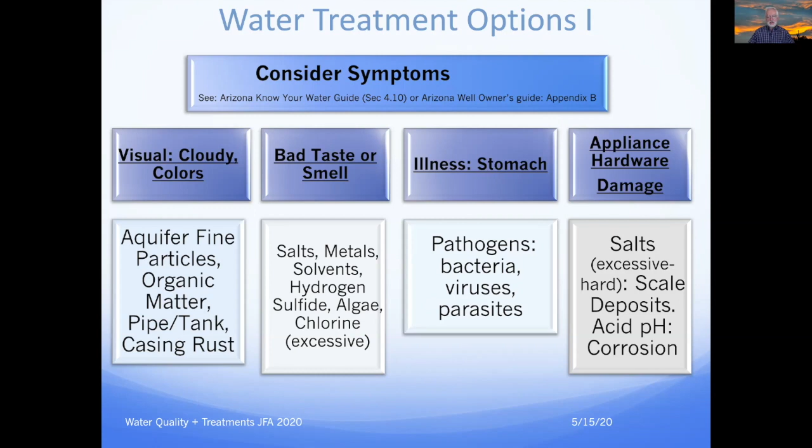Rarely do we have issues with low pH; it's sometimes low pH that can cause corrosion. All these things need to be considered before you start looking at treatment options.

One more thing before we talk about treatment options: look at this filtration guide table, which gives you an idea of the sizes of contaminants. Clay, for example, is a particle size similar to some bacteria and some viruses, but primarily viruses are even smaller than that.

These are called colloids, and we could use microfiltration or particle filtration to get rid of those things. If you get into silt, you're looking at removing primarily things that are very large in diameter, like parasites and sand. So that gives you an idea of the size.

As we go from right to left on this guide, you're going to see a significant increase in cost, energy, and complexity of your water treatment system. You should be aware of the sizes of these contaminants, and why things cost progressively more as you go from right to left when making decisions.

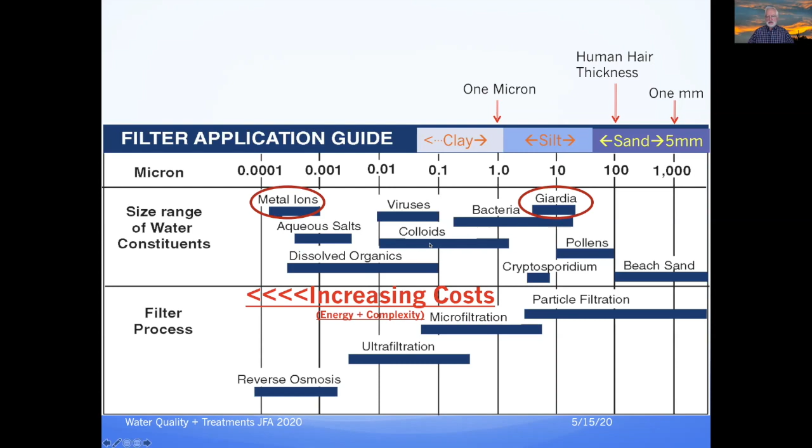Now we're going to talk about those filtering processes next. How should we start water treatment? The sequence should start first with removing particles.

If you have cloudy water due to, as Gary said, something that may rarely, hopefully, be coming from your aquifer, then you should consider particle filtration or microfiltration. If you don't need that, don't do it—just move to the next option.

The next option is: do you need chemical treatment? Do you have hard water, issues with pH, smell, reduced conditions, or sulfides? In this case, you'd use chemical filters like alkaline, green sand, or permanganate—though I won't be talking about those. If you have hard water, I will be talking about water softeners in a minute.

If you don't need that, move on to the next: do you want to lower the total amount of dissolved solids in your water? Do you have issues with nitrates, or elevated levels of arsenic, something like that? Then consider reverse osmosis as a very capable method, which is used quite a lot by quite a few people.

We'll talk more about that in a minute. There are also some iron filters that are now able to filter out arsenic as well as fluoride out of water. They're still being developed, and their efficacy changes a lot depending on your water quality.

Resins are typically used for large volume filtration. They're very expensive and usually used by laboratories. I had one in my lab for many years, we used those resin cartridges. The tanks were quite expensive to replace monthly.

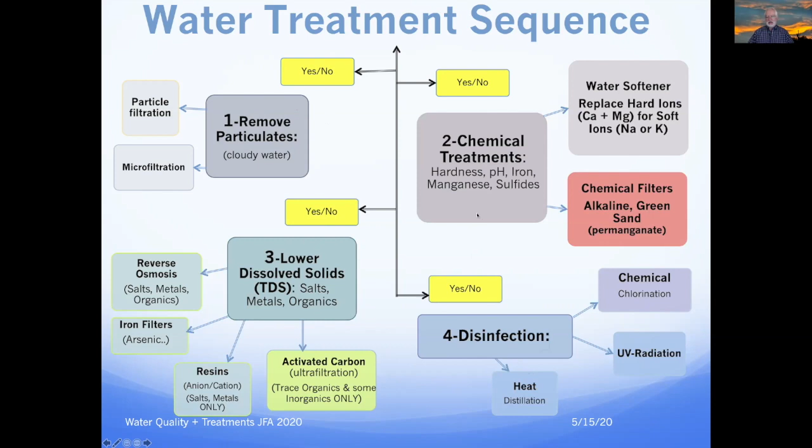So does that make sense to you all? First particle removal, then chemical, then lowering dissolved solids, and finally disinfection, in that order. But again, excluding any or all of the treatments if you don't need them. Don't add water treatment things that you don't need - they tend to actually degrade the water quality rather than help, sometimes.

So for particle removal and filtration, you can use sand filters, but those are for large volume and open air, not recommended for home users. Fiber filters are typically most common. Ceramic filters are usually only for low volume systems, not typically used by homeowners unless they have some kind of rain harvest system, a low volume system. Fiber filters come in many sizes, and they do require maintenance.

They should be cleaned or replaced regularly. Remember one thing about filters, particularly these kinds of filters, is that they can be a growth medium for organisms and even pathogens. I had an experience with that in my own lab - we forgot to replace one of those filters, and it came out a year later looking like a pile of slime. So be very careful with those filters.

Make sure that they're placed also in areas that are as cool as possible, if that's an option to you. They can be backflushed, but they should also be replaced periodically, and they may become themselves, again, sources of contaminants.

They do not remove chemicals. They will filter out clay, silt, particles, and even some pathogens, large pathogens such as parasites, and maybe some bacteria, but not viruses. They come in many different sizes, anywhere from 1 micron in diameter all the way up to 5, 10 microns in diameter.

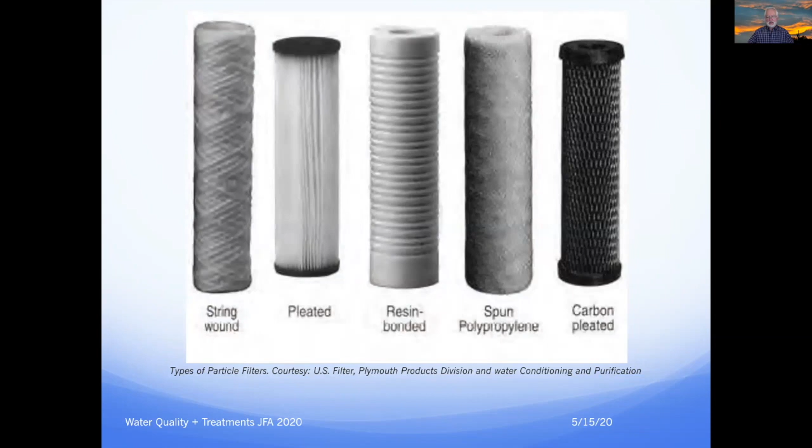Chemical softeners, so here we are now at water softeners - basically removing calcium, magnesium ions that make the scale. This unfortunately usually uses large amounts of sodium and potassium salts that degrade the wastewater quality. That wastewater will wind up in your septic, potentially degrading your septic performance. They should not be used on house plants or garden plants.

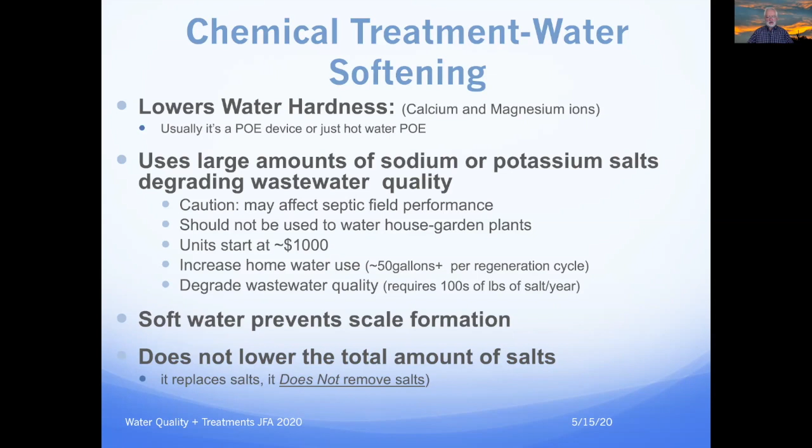The units start at around $1,000, and they're all automated now, but they will use more water, so your water consumption goes up. And they degrade your wastewater quality, requiring hundreds of pounds of salt per year. Soft water prevents scale formation - it does not lower the total amount of salts, and does not remove salts, it replaces them with different salts. Do you really need one? Be careful when you make that decision to buy one, because there are environmental impacts as well as costs.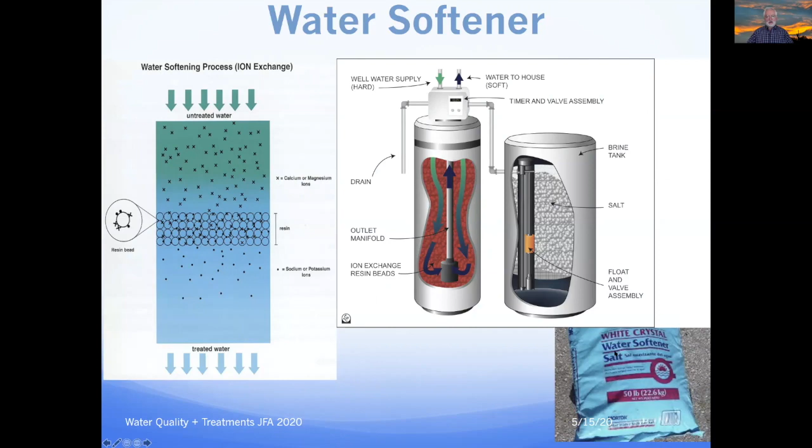Salt contaminant reduction is typically done using reverse osmosis point of use devices. Water pressure forces water through a semi-porous membrane, leaving the salts on the other side. Things like sodium, calcium, sulfate, nitrate, arsenic, lead, and some bacteria will be removed or lowered. Exceptions may include radon gas and some solvents, and depending on the system, some pesticides may not be removed. But most of the stuff you're interested in will probably be removed very well. Again, be careful with these systems.

RO units are low pressure, so they're moderate cost, but they increase your water use significantly. For every 1 to 3 gallons of water that you produce, you will use 10 gallons of water to flush the membrane. The membrane gets plugged up very easily because of the low pressure used in your system. Remember, your house has a 40 to 60 psi pressure water system, so the membrane fouls up very quickly, and then you have to constantly flush it, producing very small amounts of water in return, unlike industrial units, which are actually quite the opposite.

Removal efficiency is also important, so make sure that the efficiency removal of a particular chemical is up to date, and you do a pre-test and a post-test on the system to make sure that it does remove, for example, arsenic, if that's your concern.

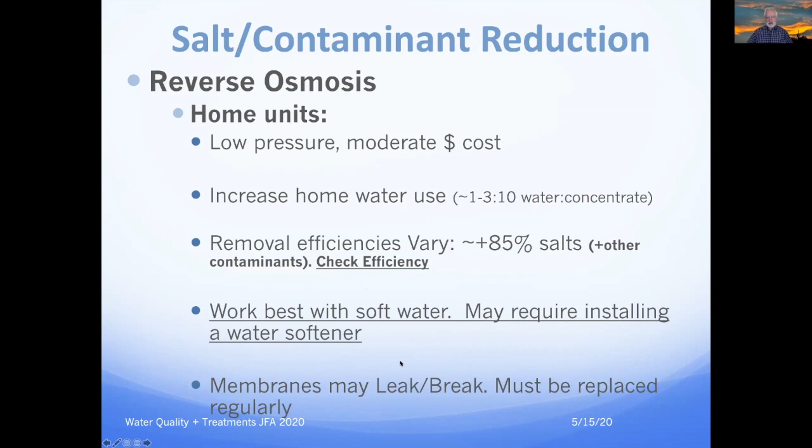These systems work best with soft water, and unfortunately that may require a water softener. That's a double whammy, and it usually increases your cost significantly. Soft water does not plug up the membranes as quickly, but it adds extra cost to your water treatment system. Membranes may also leak and break, so they must be replaced regularly.

The drain water, what's called backwash water, has to be sent to the septic system, or it could be sent outside into your yard onto some native plants you may have. I don't recommend you put it in your garden though. But some tree there that needs extra water could be a good way for you to prevent this water from entering your septic field.

Okay, and they usually are under the sink, which makes many, many plumbers highly unhappy when they have to work on those things.

They're very useful. Okay, so activated carbon now. It's very useful to reduce levels of chlorine, smell, organic chemicals and pesticides, and even some radon sometimes, depending on the carbon, which can actually remove quite a bit of radon. Usually point of use, the efficiency depends on the amount of contaminant and type of water quality, salinity and hardness, and so on. Best used with clear, disinfected water.

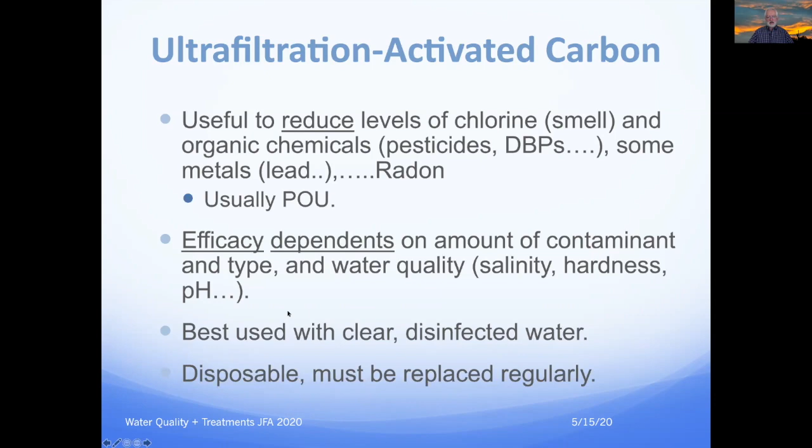So the residual chlorine is very efficiently removed by this activated carbon. But I don't know whether or not it removes any other things, because I would have to do a chemical analysis, and they're very expensive. So it's a bit of a peace of mind when it comes to removing other contaminants. They do very efficiently remove chlorine though.

So the homeowner or well owner should not rely on those systems to remove high levels of contaminants present in the water. They have to be sized properly, those filters, to remove, let's say, pesticides or hydrocarbons that you may have in your water at elevated levels. That's an extra level of complexity requiring a professional to properly size those things and make sure they're actually collecting and removing the chemicals you want. Again, I use them as a peace of mind and to remove just chlorine out of the water.

They can be under the sink too, and they're properly sized to remove more chemicals more often. They can also be attached to your faucet.

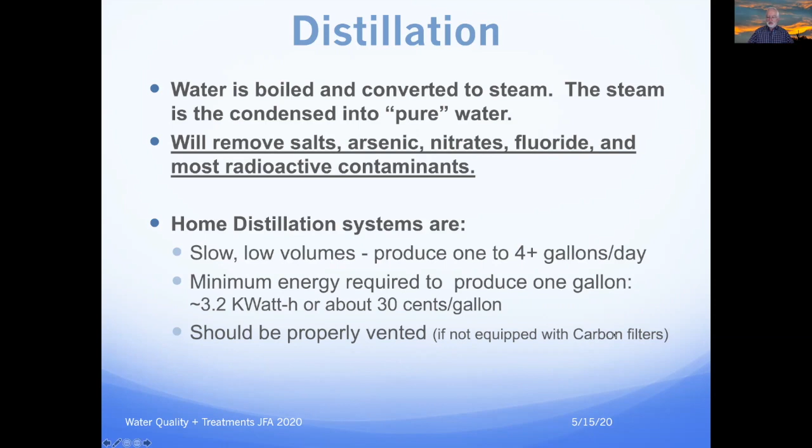They should be properly vented, and some of the new units now come with activated carbon filters, which are great to trap radon and other organic contaminants that may be coming out volatilized as you boil the water, such as disinfection byproducts, by the way. The cost starts around $400 and up, and another advantage is that they do disinfect the water.

That's a good incentive to have them if you're concerned about that. The units now are pretty much fully automated, and again, they can come with an activated filter, but do remember that it's like having your toaster running all day long, and that will increase your electrical bill.

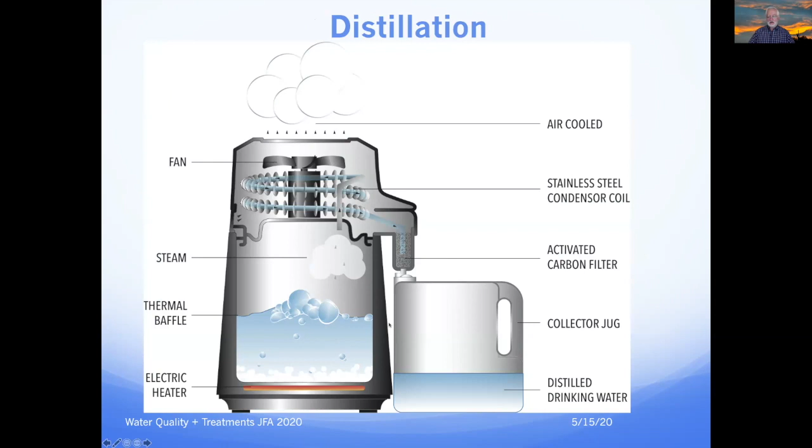Disinfection. We already talked about heat in this previous section, so now we're going to talk about chemical and UV radiation. We're almost at the end of this presentation, we're moving quickly.

Best used after particle filtration. When we talk about chemical or UV filtration, we want to have water that has already been filtered and has had as many chemicals removed as possible, particularly particulates, so that we maintain a high efficiency of those two treatments.

Disinfection, chemical and or UV, does not mean complete removal of pathogens. What do we mean by that? The pathogens are deactivated, basically rendered inactive or unable to reproduce or infect you, but they're not removed from the system. It doesn't really matter though, they're dead, hopefully.

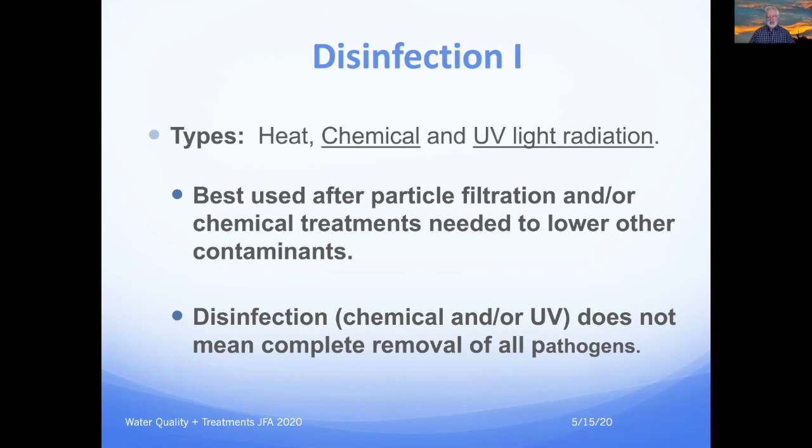Disinfection that's not commonly used, but can be used for well owners that have large wells with a lot of water requirement. You can hook up basically a contact tank, a bleach tank with a meter system that delivers a small amount of bleach into your water as it comes out of the well, and goes into this contact tank that's necessary to make sure that the bleach or chlorine does its job at inactivating the pathogens.

Then it goes into your pressure tank, and then into your pump system, and then it has to go through a large activated carbon filter, because as I mentioned before, anytime you chlorinate water, you will be producing disinfection byproducts, which are quite nasty.

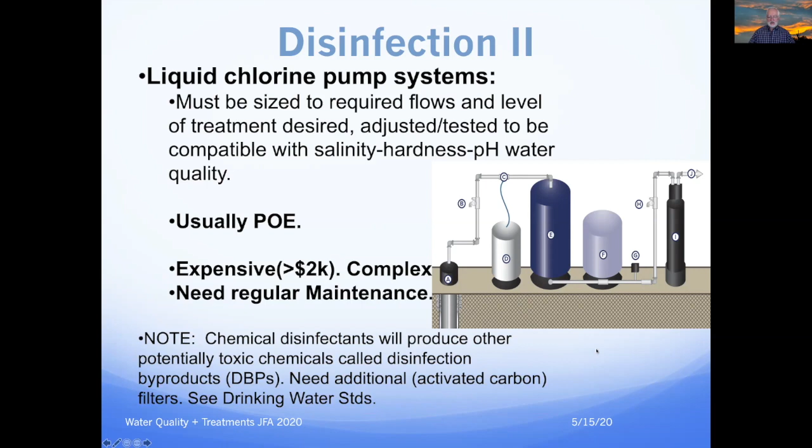They come in many sizes, but they are expensive and complex to maintain and need regular maintenance. They're usually point of entrance systems. Chemical disinfectants will produce, again, toxic chemicals called disinfection byproducts.

One more popular system now for disinfection is UV radiation, and UV radiation class C in particular is the best, doing the most damage to bacteria and other pathogens. They're not designed really to treat wastewater, they're designed to treat clean water, that is, without any particulates.

They're flow-through design, needing particle-free water. That's important, going back to what we mentioned before. They're large units, using more than 100 watts, so it's not as bad as distilling the water, but it will increase your electricity bill, because they're usually constantly on all the time. They're plugged in, you walk away.

Consider electricity use. They're usually point of entrance in your house. They cost at least $400 and up. They're very low maintenance, that's the good news. Very simple design, and they just need periodic lamp replacement.

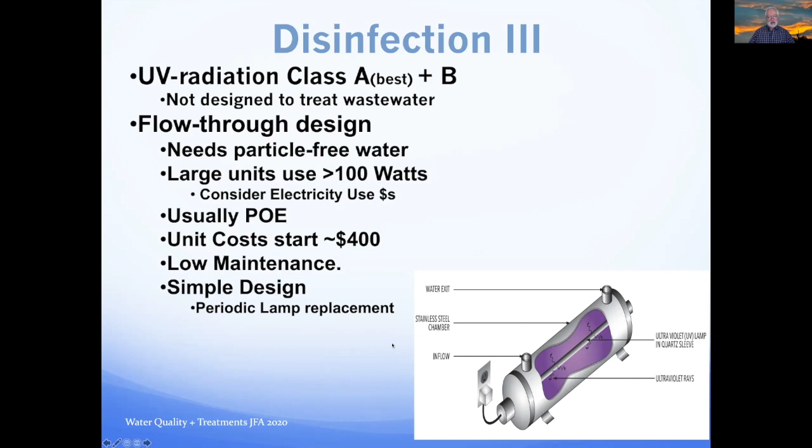Again, particle-free water is required. They're very popular now, even for homes that are hooked up to public water utilities, kind of as peace of mind. So well owners might want to consider some of these systems too, but again, they're not necessarily cheap, but they're a lot simpler than chlorination or other treatments.

So we're almost at the end here. The water quality of groundwater varies greatly depending on your aquifer and the geology and human activities. I think Gary Hix made that very clear. It's a bit of a luck of the draw, location, but also human activity.

So wellhead protection is very important for you and for your neighbors downflow, downhill. Gary may have mentioned that the water that flows in an aquifer below your house is not yours. It's only yours once it's inside your tank. Otherwise, it's communal property. So protecting your wellhead is important for you, but also for your neighbors downstream.

Common contaminants in Arizona that we discussed include basically common salts that degrade the water, some nitrates, arsenic naturally occurring, fluoride, and radioactive elements. Being aware of those major contaminants is important in your water quality considerations.

Private wells are exempt, however, and they're not required to test their water. Please do consider testing your water, at least for the contaminants that we mentioned. Again, refer back to table 8.1 for more explicit guidelines on how to test your water, how often, and annually in particular.

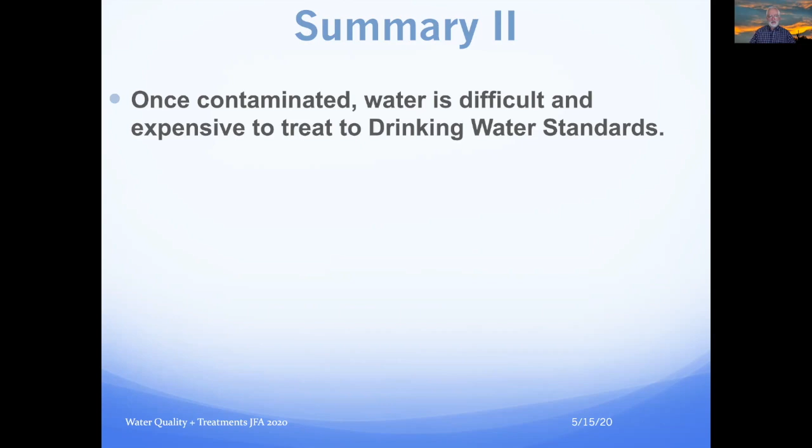Home water treatments, from particle filtration to reverse osmosis and disinfection, vary greatly in cost and complexity, again supporting the previous statement.

All water treatment systems require periodic maintenance and testing to ensure continued efficiency. They're not plug-and-play systems. Oftentimes people complain that those systems require a lot of maintenance, or they forget to maintain them. Remember what I said before about filters - they can actually themselves be sources of contamination. So maintaining those filters and replacing membranes is important to ensure water quality.

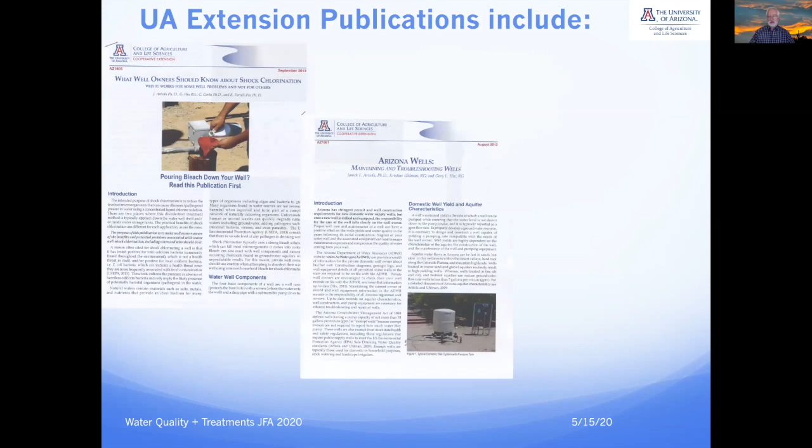And so finally, we're almost there. UA Extension publications include the following: we have one that Gary already referred to, on whether or not you should chlorinate and why, being very careful about that, with some assistance from professionals. Please read this bulletin. We also have another bulletin on maintaining and troubleshooting wells. Gary alluded to that. This is a great bulletin, I think, to the extent that it has a table that will give you some very important information about how to maintain your wells.

Another one is on drinking water storage tank disinfection and maintenance, if you have those. More and more Arizonans have to, unfortunately, depend on trucked-in water. Another one is record keeping and registration that Gary mentioned. It's an excellent primer on how to do that stuff that Gary covered.

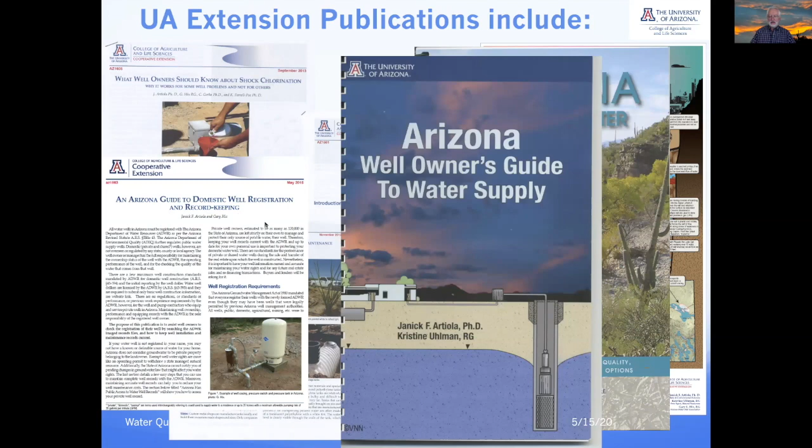We also have some general education about aquifers in Arizona, and the first publication that we had, Arizona Know Your Water, the second revision of it. And now here we have one that we recommend you get a copy of, which is the Well Owner's Guide to Water Supply, second edition, which was again co-authored by myself and our other partner in crime, Kristine Uhlman, who's retired, and Gary Hix.

One last couple more things - we have this well-owner video series that we often forget to plug. You'll hear that it was produced by Kristine Uhlman and narrated by Gary Hix, and they're all online on YouTube. Aquifers in Arizona, well drilling, well components - great videos.

And many other ones that we've co-authored over the years that we think will be helpful to you, and 15 other related publications you can find on the website of University of Arizona. Excuse me, and we also can provide you those publications through a thumb drive. It's available on request.